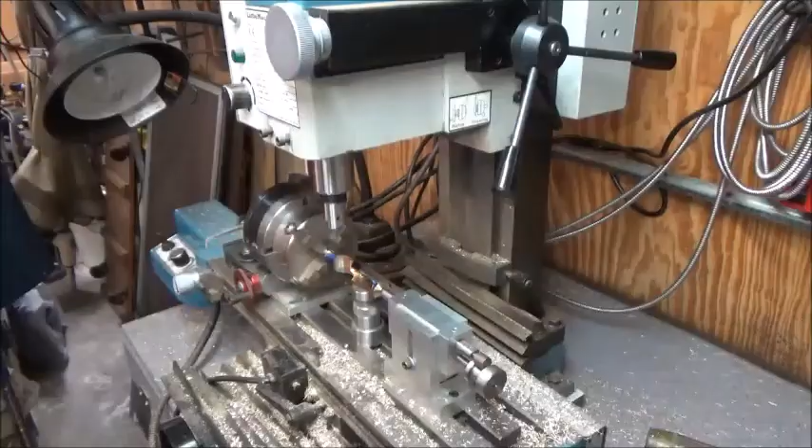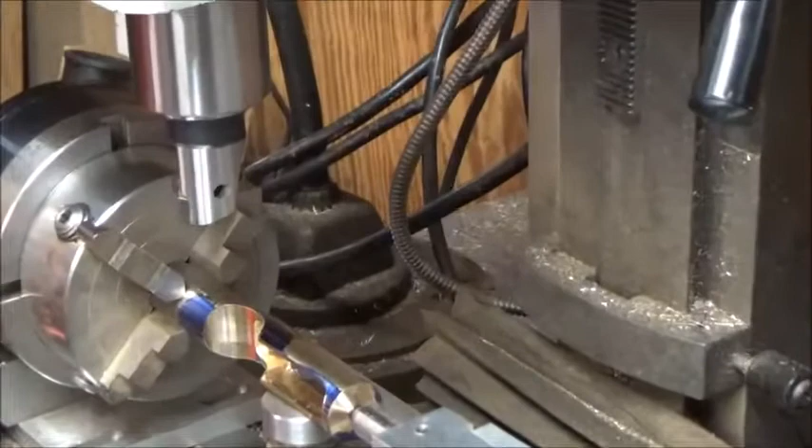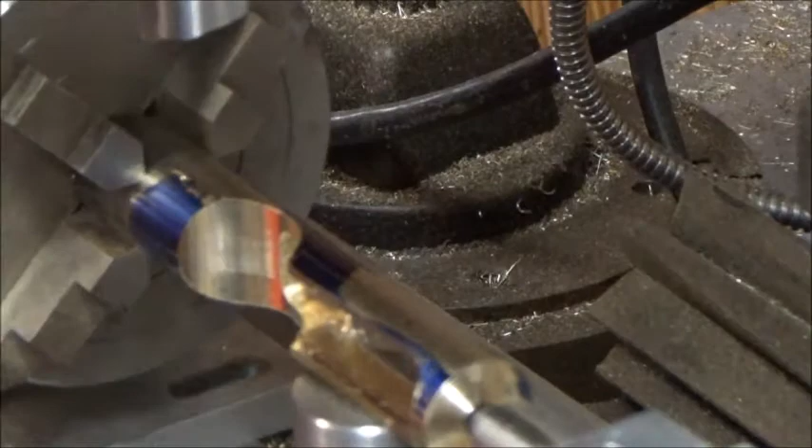Okay, we're back over to the mill, and I won't be able to completely show you everything, probably, because we can't get the camera in there to do that. But let me just zoom in on what I did, and hopefully I can keep my hands out of the way here. So you can see the unit there, okay, and I put some Dykem on here and there to make sure that I'm going in the right place. You can see the 1-inch end mill here, okay?

So that's a 1-inch end mill, and all I did was work my way down through, and I've got a jack under here, but this still isn't very solid. Most of the brass has been cut away, so it's not a really good setup, but it's the best I could figure out how to do. So let me quickly zoom out again a little bit. And so actually, yeah, we're in the right position here to actually cut the flute.

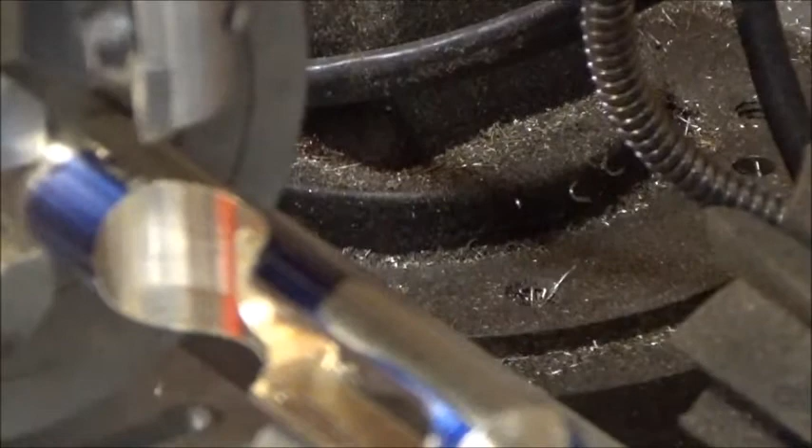So there is another large radius, and I don't think you can see it. It's on the other side. It's on the opposite side of that radius there. And so that is cut. So I cut those two large radiuses. So let me go to the computer and explain what I did, and then we'll get busy cutting the flutes.

We're gonna cut four. Let's see, I don't remember exactly now which side is which. I think on this side we're gonna cut 2 short flutes here and here, and we're gonna cut 2 long flutes on the other side. So I'll show you that on the drawing on the computer. So with that, I'll end this little portion here, and I'll move the camera to where the computer is, and we'll look at that.

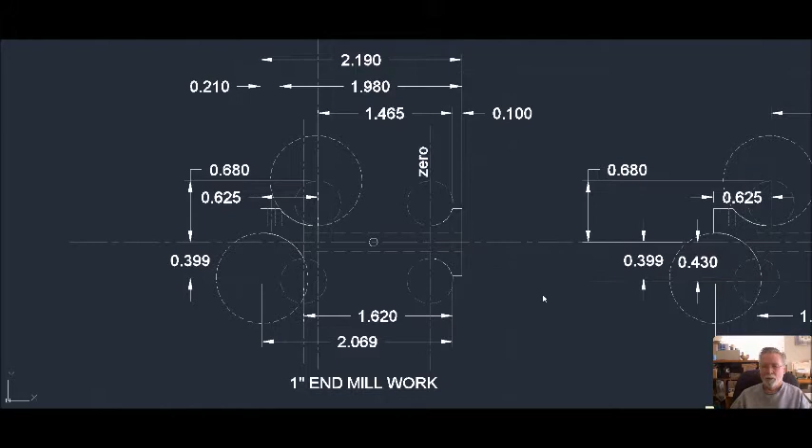Okay, I've got AutoCAD on the screen right here, and here's the unit right here. Okay, hopefully you can see the cursor. So here's the unit we're working on. And these are the 2 large radiuses that we just cut, right here and right up here, okay? And I'll try to make a quick, simple explanation of this.

What I did was I went back here to a 0 point, and I put in some dimensions for this. So I've used the two 0 points, which is the center right here, to measure from that point up to the center of this radius here, okay? And I've also measured to the center this way from a point over here, okay? And I put those two dimensions in.

Then what I did was located the end mill per those dimensions, and then just worked my way down through the unit on the mill. And I did the same thing with this radius down here. I calculated the distance from the center down and the distance from this point over. And I found these points with the edge finder, and then just came over on the DRO and located the 1-inch end mill, okay?

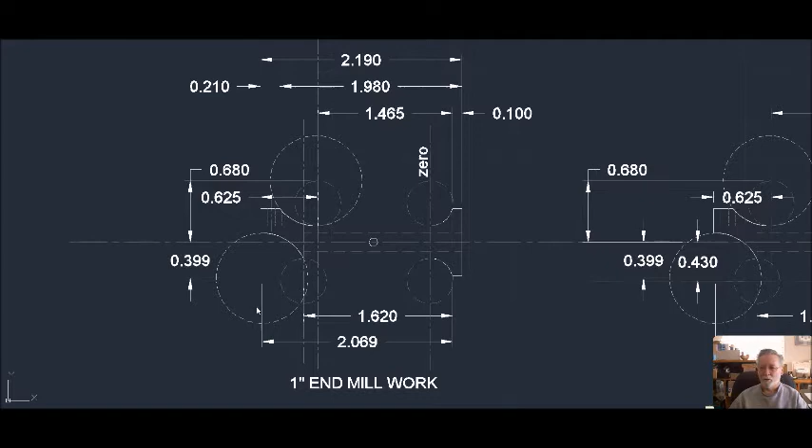Next thing we're going to do is cut the flutes, okay? So let me go up here with AutoCAD, and I've laid out the flutes. And I've laid out a lot of drawings here just to let you know. The work I did with the 1/2-inch end mill, the work I did with the 1/4-inch end mill, and some other insignificant stuff over here. Anyway, I've laid out the flutes now, and what I've determined is there's two flutes, but I have to know how far to turn the rotary table.

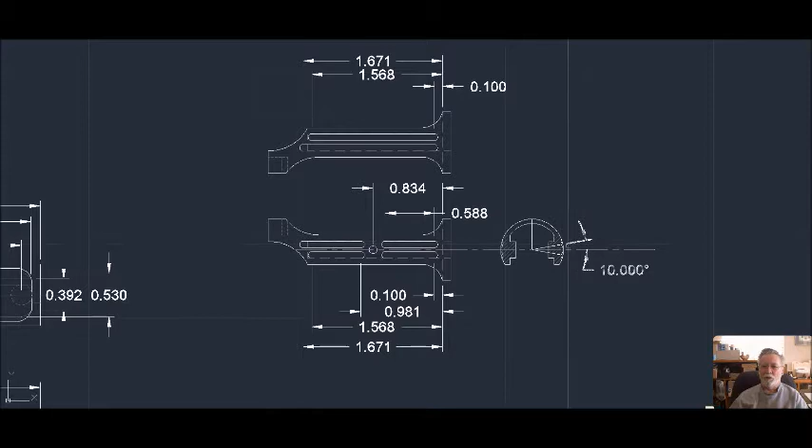So I had to array the flutes around the diameter here to see, per the picture, what the angle was. So I've determined that the angle is 10 degrees. So I need to move the rotary table 10 degrees either side of this center line to mill the flutes in here. And I put some dimensions on the flutes. So this is a 1/2-inch ball end mill, and it's only going in 20 thousandths. It's got a depth of cut of 20 thousandths. So I put some dimensions on here so I know where to go.

And so that's what we're going to do next, is mill these flutes. And this is going to probably take me a few minutes, so I may fast forward through this. But at least we'll get all this on video. And the main thing I wanted to explain is the procedures that I use, because this isn't really explained in the instructions. Other than that, just need to mill the flutes. And so there's a picture with the instructions. So I use the picture to make my own drawing, like I do everything else.

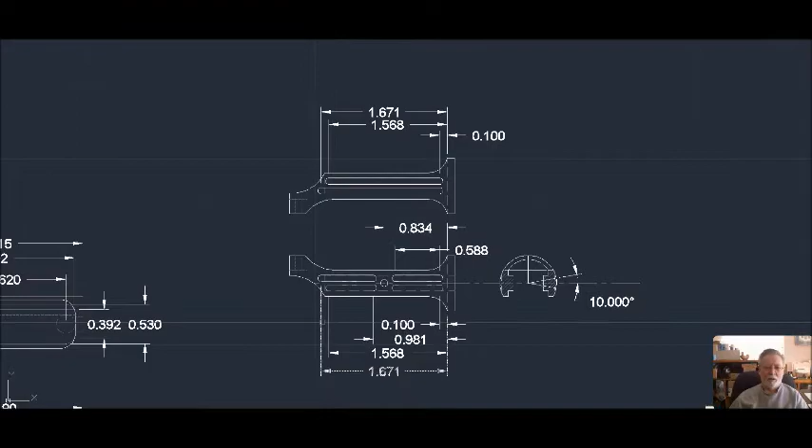And I wanted to explain the procedure on this because they say you can. I did this with a 1-inch end mill. They say you can do this with a boring head. Mine's a little bit large for this procedure. I could have used it, I suppose. You have to leave enough stick out up here from the chuck so you have room to do these things. So I've got some material up here that I had to leave extra stick out there, so I had room to get these cutters.

They say you can do this with a fly cutter too, and that would probably do the same thing, except you need the room to do that. So the end mill took up the least amount of room as far as I was concerned, so that was the easiest way to do it.

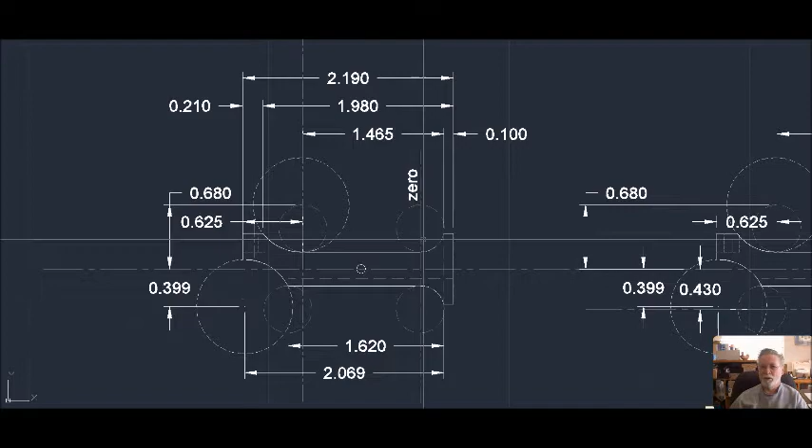Well, with that, I'll just call off this little portion here, and we'll go back to the shop and get busy cutting these little flutes and drill this one hole through here. And then we'll be ready to put the chuck back in the lathe and cut this off and do a few little additional things. But basically this will conclude all the milling work on this unit. And it has been a journey, that's for sure.

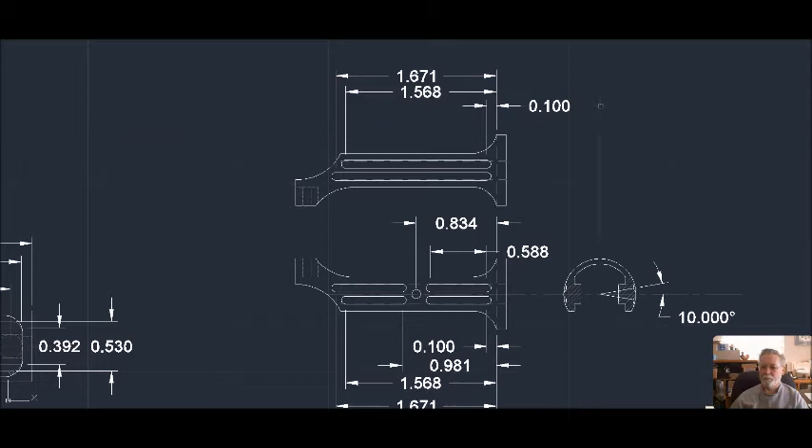Okay, this is a little bit touchy business, so I'm going to drill the hole here off camera. I put the 4 flutes in this side. This is the most tedious side. So I'll go through the procedure on the other side. It's the same thing. So I gotta turn this thing around 180 degrees, and I'm gonna put some Dykem on there so I can see what I'm doing.

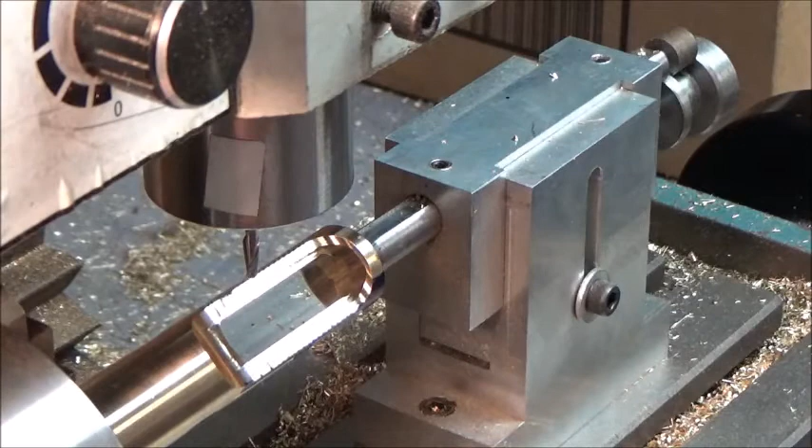And I'm gonna mark the... we're gonna go to 90 here. Let's see where we're at here. I made a mistake once before here. That's a disaster, so got to be really careful. This rotary table is easy to move, it's easy to read the fine dial, but this dial here, the main dial, is metal on metal, and it's a little hard to see. Easy to make a mistake. So okay, let me move this out of the way.

I notice this isn't coming out exactly perfect either, because I had to do a little touch-up work right here to get this to blend in. And by the way, you're seeing the radiuses in better light now than you saw on the computer or you saw before. So I had to do a little work here to get this to blend in. This side ended up with a little more taken off of it right here, so 5 thousandths off. So actually I didn't figure that in when I did the drawing, but it's okay. It's just a few thousandths, but it is noticeable.

So I'm going to put some Dykem on here. These are the easier slots actually, because, and then I'm going to mark it off with the calipers. That way, if I'm going to make a mistake, I can see it. Okay.

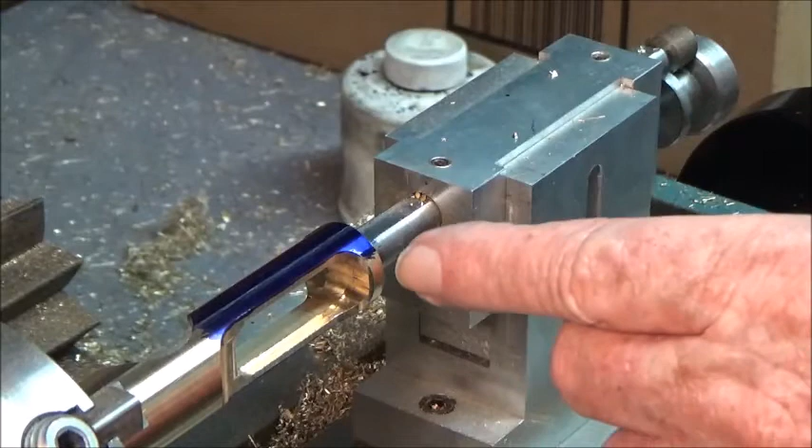Now I've already got this set, so this 0 point back here is set exactly. So I'm good there. I happen to know that right now this thickness here is 155 thousandths. It's got to go down to 100 thousandths. So I've got to put this in a collet on the lathe and turn this end down a little bit, and this end gets a hole bored through it too. So that'll happen on the lathe later.

I will cut this off to length here. Let's see. I just moved this chuck over to the lathe actually. This chuck goes on the Taig, the little Taig lathe. In the end, I'll have to use a 3/4 collet. I misspoke. This goes on the Taig lathe. Did I say mill? I don't know.

Okay, so I'm going to set the caliper here for 155 thousandths. Then I'm going to go another 100 thousandths, because that's where the flutes start. So 100. So that's 255. Touchy. Bear with me here. Okay, it's pretty close. We're within a half, so there's where the flutes start, right there. That's the center of the cutter, okay?

So, okay, now, where do they end? Again, they end at different lengths. So one of them ends at the short one, the 1.568. There's where the short one ends. Oh, wait a minute. That's not right. I got to add to that. See, 1.568.

I got to add 155. 1.568 plus 155. Well, 1.723. Let's see if that looks better. See, that's a good reason to do this. Yeah, that looks better. That's the short one. It goes almost to there.

Okay, the next one is 1.671. So add 155. 1.826. Well, this one goes all the way out to here. Maybe I should have left a little bit more room. So let's go back here. This is, let's see, I came in 100 thousandths, so let's go to 100. Well, there we are. That looks right.

Now we need to move the rotary table 10 degrees. Let's go this way with it. Well, there's 10 degrees that way. We're going to touch off, and we're going to go down 20 thousandths. Now, technically, it should be right. Well, I changed it here, so I guess not.

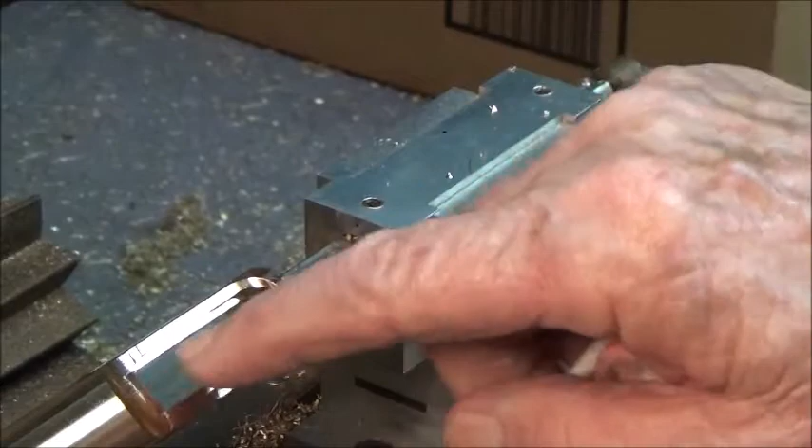Let's move the rotary table around again. Well, that looks all right, I guess. Clean the Dykem off, see what it looks like. Okay, got it. Move the rotary table around the other side. This side looks better, actually. I got to take a little bit out of here. There's a whisker in here that's got to get filed out later. Nothing I can do about that. There's that side.

Okay, I think that concludes this video. There's a 93 thousandths hole that's got to get drilled and reamed in here. So I'll do that off camera, and then I'll be moving this over to the lathe, the tag lathe, and cut this off to length, which is right here. This entire amount is extra that was left on here. I can see now that I left way more than I needed to. So that is what it is, I guess.

So okay, with that I'll call off this segment. This will be segment D. This will be a final wrap on this. I've gone through most of the procedures, so if anybody's building this Vickie project, this might help. At least this kind of boggled my mind in the beginning. That's why I've gone to a little extra length on the videos.